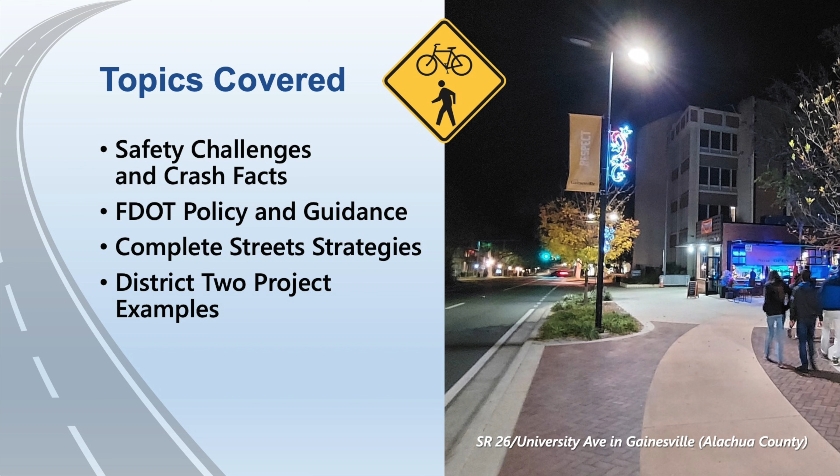We'll showcase complete street strategies and some real-world project examples in Northeast Florida, which help work towards zero fatalities on our local roadways. Let's discuss why complete streets are important for both safety and mobility. Because most of Florida's population growth and development occurred in the age of the automobile, our transportation system can be challenging to non-motorized road users, pedestrians, and cyclists.

After making some progress through the 90s and early 2000s, pedestrian fatalities have been on the rise for the last decade. Nationally, 76% of fatal pedestrian crashes occur at night, and nearly half involve alcohol. The overall pedestrian fatality rate for men is about 2.5 times greater than for women. The highest fatality rates overall are among adults aged 55 to 64. When a fatal pedestrian crash occurs, the driver leaves the scene about 20% of the time.

Nationally, bicycle crashes follow many of the same patterns as pedestrian crashes, with nearly half of fatal bike crashes occurring at night, and 86% involving male cyclists. In 2019, the last year for which national data has been analyzed, Florida had the highest number of bicycle fatalities of any state, and among the highest ratios of bike fatalities compared to all traffic deaths.

Pedestrian crashes account for approximately 20% of the fatal crashes in the 18 counties comprising District 2. The four most urban counties, Alachua, Clay, Duval, and St. Johns, account for nearly 3/4 of all fatal pedestrian crashes and approximately 80% of pedestrian crashes overall. Similar to national statistics, 77% of fatal pedestrian crashes occur at night, compared with just 54% of all fatal crashes.

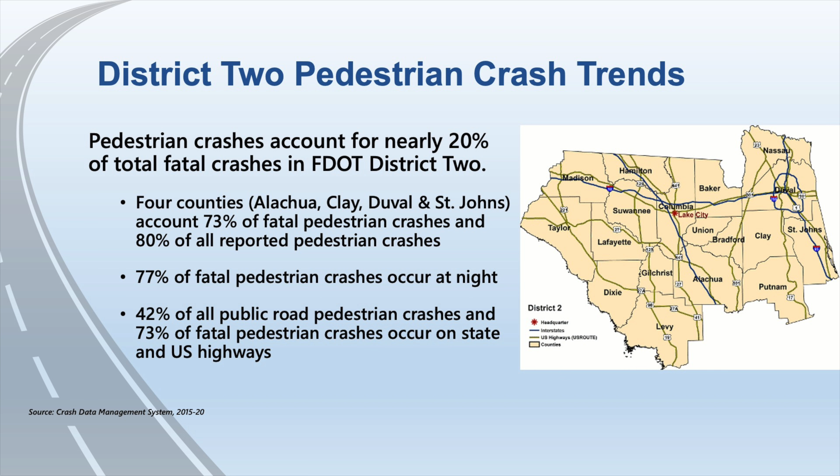Similar to pedestrian crashes, bicycle crashes are concentrated within District 2's most urban counties, with 3 counties, Alachua, Duval, and St. Johns, accounting for 73% of fatal bike crashes and 84% of all bike crashes. Approximately half of the fatal bike crashes occur at night, which is similar to the nighttime percentage for all fatal crashes. Nonetheless, this points to the importance of roadway lighting, proper bike lights, and retro-reflective clothing as mitigating measures for bicycle crashes.

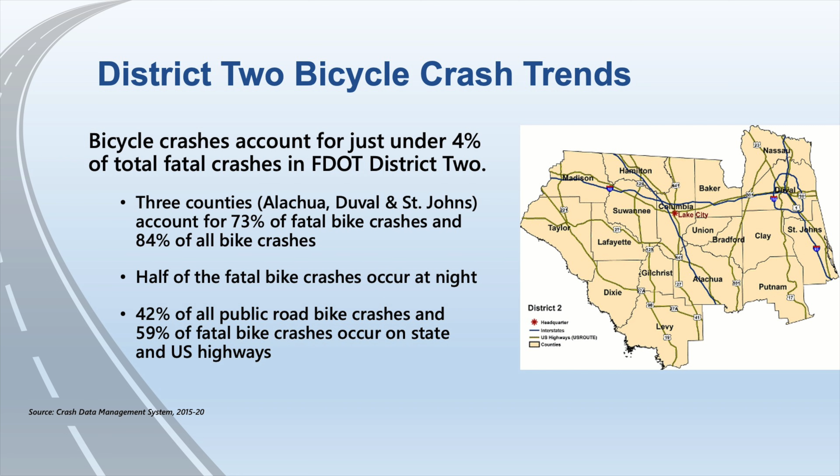The percentage of bicycle crashes occurring along state-maintained highways is nearly identical to that of pedestrian crashes, 42%. However, bicyclist fatalities are more evenly distributed between the state and locally maintained roadway facilities. Let's talk about FDOT policy and how they've responded to these safety challenges to move towards safer, more complete streets.

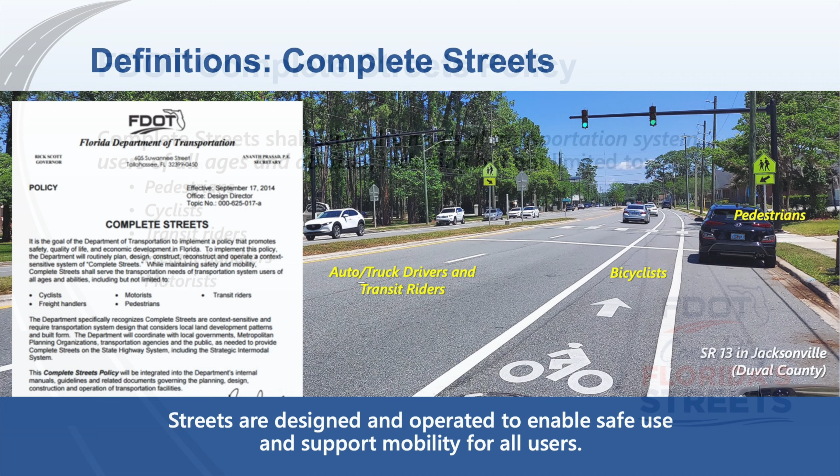Recognizing these challenges, the FDOT Complete Streets policy was officially adopted in 2014. The approach for the department is to consider all users of all ages and abilities in how it plans, designs, builds, and operates its transportation system. Complete streets mean roads that are designed not only for passenger cars and trucks, but also for transit riders, pedestrians, and cyclists. The Complete Streets policy called for broad changes throughout the department to revise manuals, guidelines, and standards, effectively changing how FDOT does business.

The policy also explicitly states that complete streets are meant to promote safety, quality of life, and economic development, all goals of local communities. Lastly, the policy stresses a system of complete streets. Not every street will be the same, and instead, the idea is to build the right street in the right place and have each street support a complete network of transportation infrastructure for all modes.

One important way complete streets are implemented is through context classification. The context classification system broadly identifies the various built environments existing in Florida, based on the general characteristics of the land use, development patterns, and roadway connectivity along a state roadway.

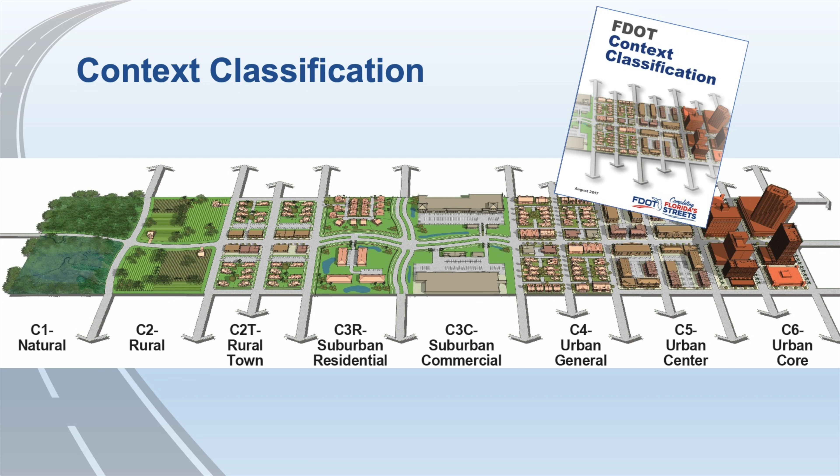These attributes provide cues as to the types of users that will likely utilize the roadway, which in turn is used to make decisions about roadway design parameters. The next few slides provide an overview of each roadway context class.

The buildings surrounding the roadway in this context are generally 1- or 2-story agricultural or single-family residential that are detached from the road. Rural roadways have an allowable design speed of 55 to 70 miles per hour. These roads are considered high speed, which must be taken into consideration when figuring out which complete street elements can be incorporated.

Roadways in the rural town context classification are located where small concentrations of developed areas are immediately surrounded by rural and natural areas. This includes many historic towns in rural parts of the state. Rural town roadways have an allowable design speed of 25 to 45 miles per hour, which means measures must be taken to slow traffic in advance of entering the town.

Thoroughfares in the suburban residential context are areas with mostly residential uses within large blocks and a disconnected, sparse major roadway network. Suburban residential roadways are common throughout Florida and have an allowable design speed of 35 to 55 miles per hour.

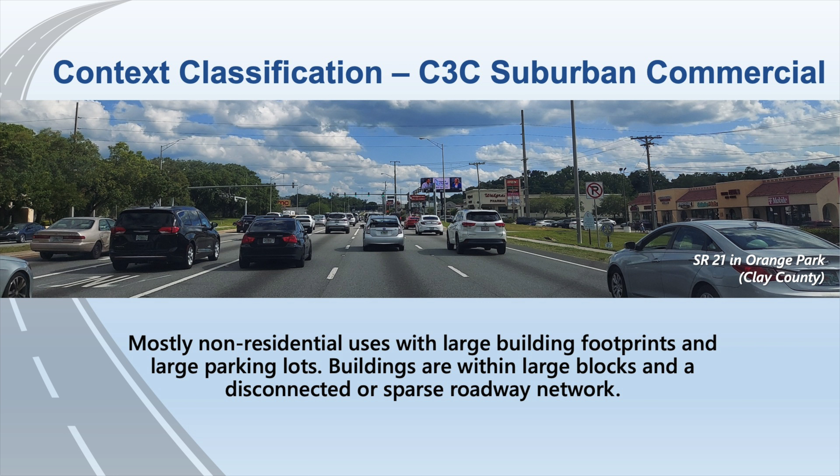Roadways in the suburban commercial context classification are similar to suburban residential roadways but are fronted mostly by non-residential uses, with large building footprints and large parking lots. Buildings are within large blocks and a disconnected or sparse roadway network. Suburban commercial roadways have an allowable design speed of 35 to 55 miles per hour. These roadways are often problematic from a safety perspective for both motorists and non-motorized road users.

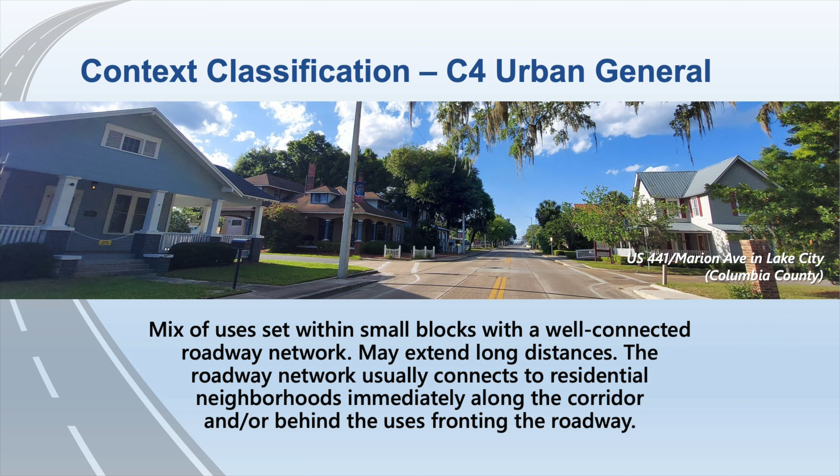Roadways in the urban general C4 context classification reside in areas with a mix of uses set within small blocks with a well-connected roadway network. Often these areas were developed prior to 1950 with residential streets connecting neighborhoods along the corridor or behind the uses fronting the roadway. Urban general roadways have an allowable design speed of 30 to 45 miles per hour.

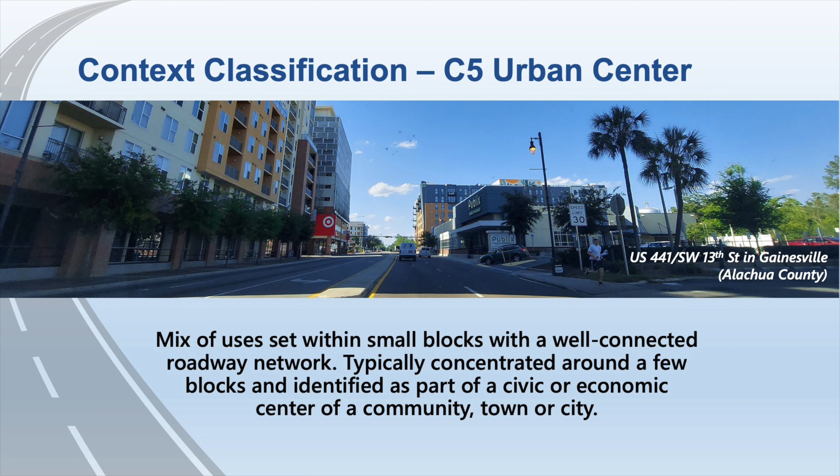Urban center roadways are typically concentrated around a few blocks and identified as part of a civic or economic center of a community with a well-connected grid network. The roadways in urban centers have an allowable design speed of 25 to 35 miles per hour, reflecting short blocks, more intense land uses, and greater demand for non-motorized mobility.

Urban cores are the areas with the highest densities and building heights within large urbanized areas. Buildings have mixed uses and are built up close to roadways with a well-connected grid network. Urban core roadways have allowable design speeds of 25 to 30 miles per hour, again based on a higher prioritization of non-motorized trips.

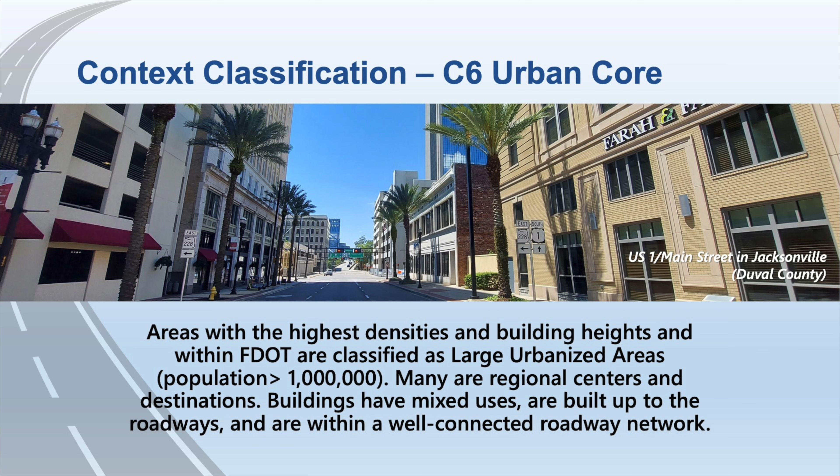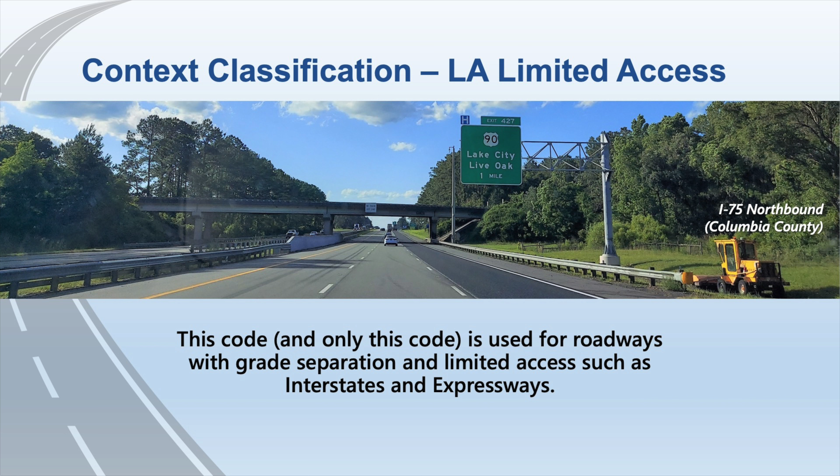Limited access roadways can pass through any of the other context classes and are, by design, separated from the rest of the roadway network except at defined interchange locations. Having established a complete streets policy and context classification system, FDOT developed a new design manual in 2018 to link roadway design criteria with a roadway's context classification. Among other things, the FDM establishes guidance for sidewalk width, appropriate bicycle facility type, lane width, and speed limits.

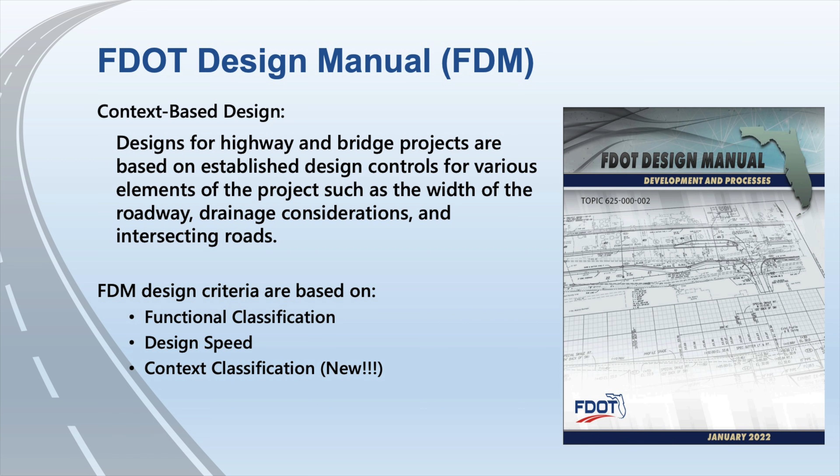Roadway speed limits are primarily derived from the physical characteristic of a road and drivers' normative response to these design cues. In other words, most drivers base their speed on what feels right for the road, and posting a different speed limit without changing the design of the roadway is unlikely to dramatically change drivers' operating speeds without massive traffic enforcement.

The FDM acknowledges this chicken and egg relationship, but introduces a new concept to help trigger design interventions over time to achieve more appropriate operating speeds for each context area. This is referred to as a roadway's target speed and is based on a range of factors, foremost of which is to optimize safety.

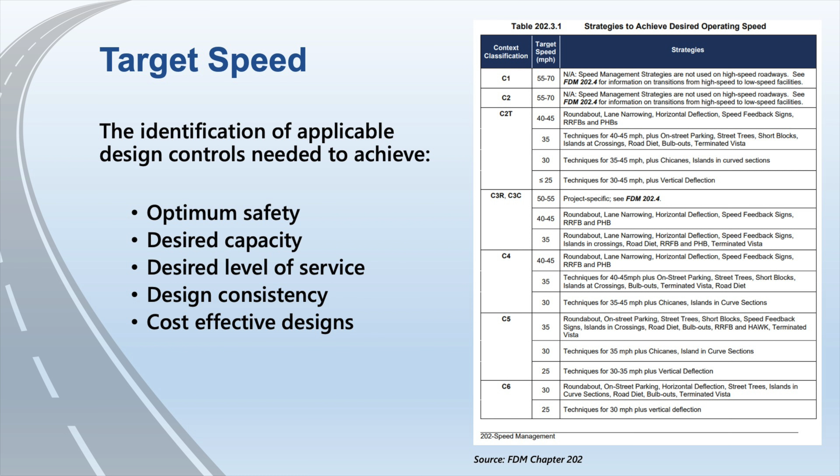Once a target speed has been established, various design strategies can be employed to modify the roadway's design so that drivers adjust their behavior and begin operating at safer speeds. Some of these speed management strategies can be implemented as low-cost improvements done with roadway resurfacing projects.

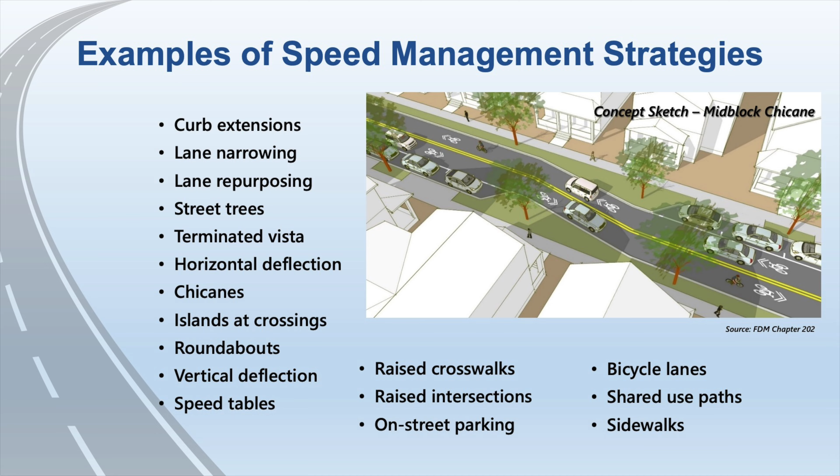High-emphasis crosswalk markings can improve pedestrians' ability to safely cross the street, and where conditions warrant, mid-block crosswalks may be installed, sometimes used with supplemental warning devices to help ensure drivers stop for the crosswalk. When crosswalks are installed at unsignalized locations on higher speed, busier roadways, it's important to provide supplemental warning devices to raise driver awareness and compliance.

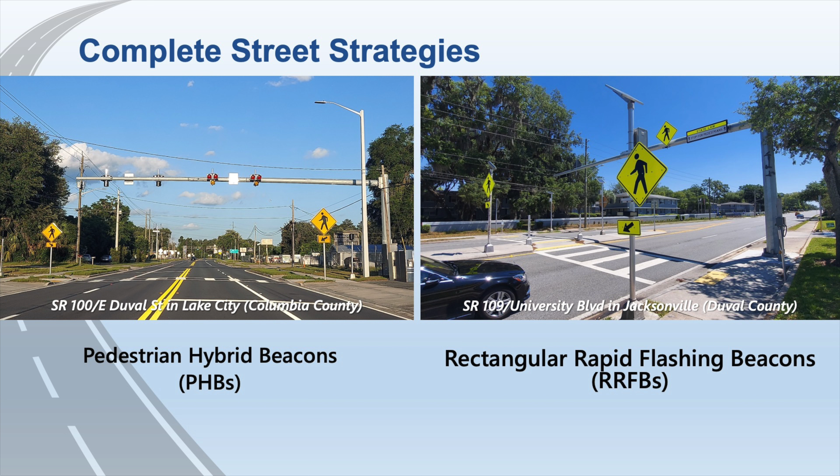Pedestrian hybrid beacons require traffic to come to a full stop using an overhead solid red beacon light and then allow traffic to proceed when clear with a flashing red beacon. In this way, they cause less delay to traffic than a conventional signal, but nonetheless provide a high compliance rate for pedestrians. Rectangular rapid flashing beacons use a wig-wag strobe effect, which can supplement pedestal-mounted beacons with an overhead element on particularly busy roads.

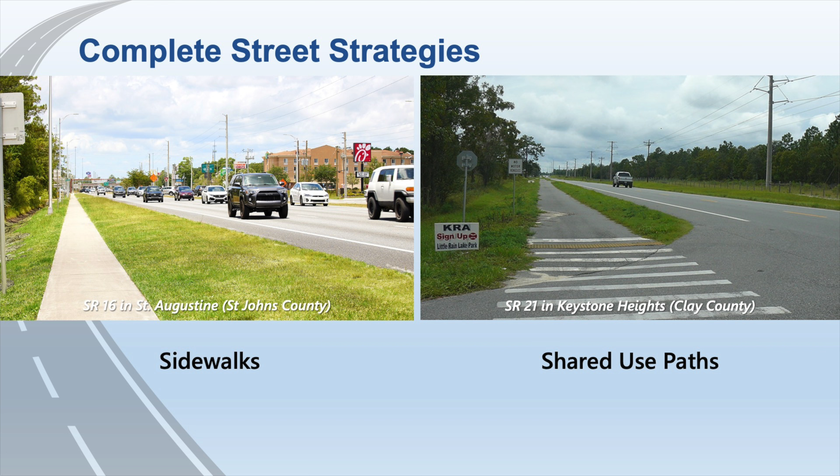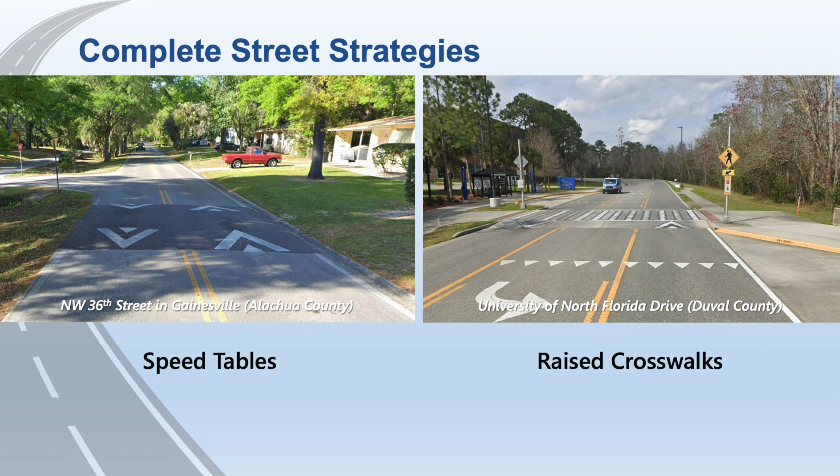Along lower-speed roads with high pedestrian volumes, features like speed tables and raised crosswalks are important parts of the overall speed management toolkit. These measures use vertical deflection to force motorists to slow down in order to maintain an acceptable level of comfort. Typically, vertical deflection strategies would not be used on the state highway system, where they would be contraindicated by higher target speeds and volumes. But they could be used in limited circumstances, such as within channelized right turn lanes. When planning speed management strategies with vertical or horizontal deflections, it's important to coordinate with EMS and transit to help avoid unintended adverse impacts.

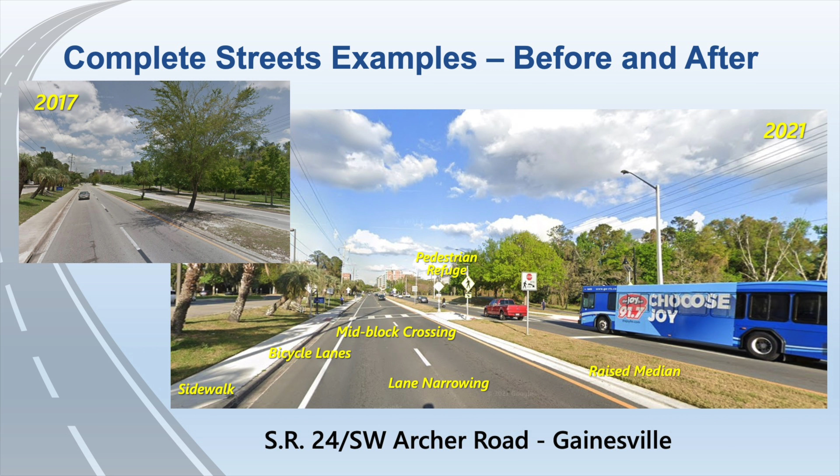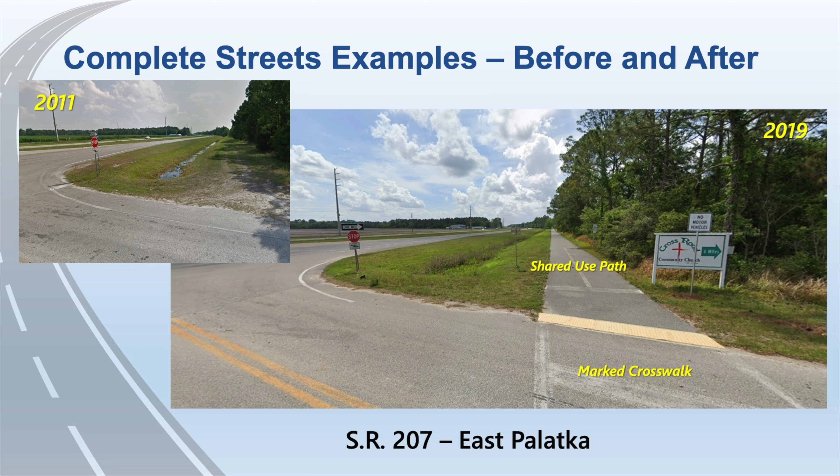This concludes the Community Traffic Safety Program presentation on Complete Streets.